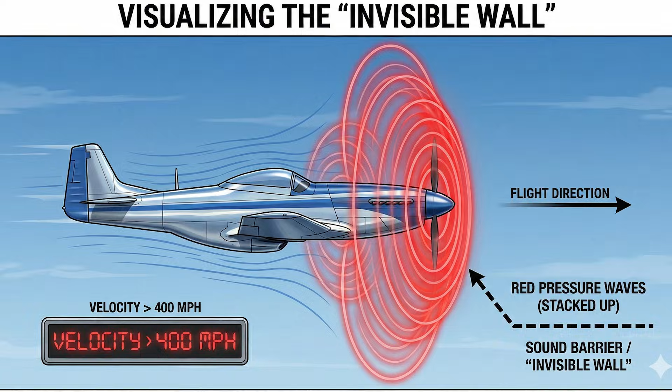Into this breach stepped John Stack, a figure who would become the single most influential aerodynamicist of the mid-century American aeronautical establishment. Stack was not merely an engineer, he was an architect of research infrastructure and a strategist of technology. His tenure at the National Advisory Committee for Aeronautics, NACA, and later the National Aeronautics and Space Administration, NASA, bridged the era of the biplane and the era of the Mach 2 interceptor.

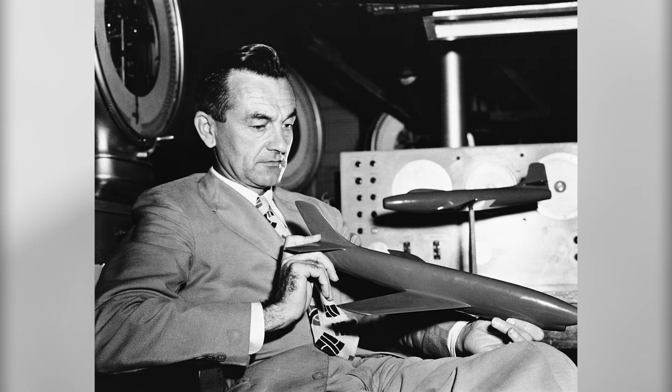Unlike his contemporaries, who often specialized in narrow subdisciplines, Stack possessed a holistic vision that encompassed theoretical physics, experimental facility design, and flight test operations.

This report provides an exhaustive analysis of Stack's contributions, positing that his genius lay in his ability to identify blind spots in aerodynamic knowledge, specifically in the transonic regime, and to construct the physical and intellectual tools required to illuminate them. From the identification of the compressibility burble to the design of the Bell X-1, and from the revolutionary slotted throat wind tunnel to the variable sweep wing, Stack's career is a roadmap of the solutions that made modern high-speed flight possible.

His unique distinction as a two-time Collier Trophy winner, once for a vehicle that broke the sound barrier and once for the ground facility that made such vehicles routine, underscores the duality of his legacy. He was the master of both the air and the wind tunnel.

John Stack was born in September 1906 in Lowell, Massachusetts, a city that was, at the time, a pulsating heart of the American Industrial Revolution.

Growing up amidst the massive textile mills and hydropower systems of the Merrimack River, Stack absorbed the ethos of heavy industry and mechanical pragmatism. His early interests were kinetic and visceral. He was drawn to motorcycle racing and amateur radio, hobbies that required a hands-on understanding of power, speed, and invisible transmission waves, themes that would echo in his later work with propulsion and shock waves.

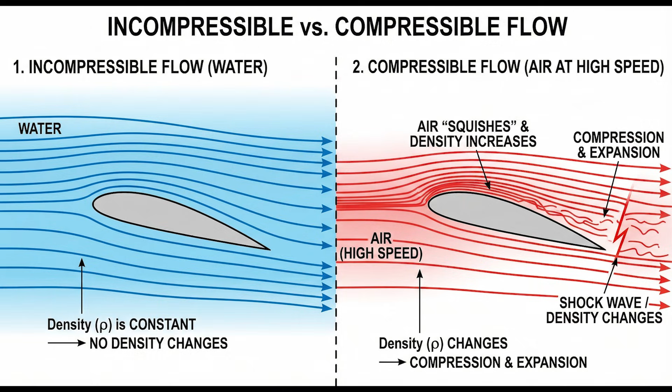However, as racing seaplanes and early monoplane fighters began to push speeds higher, pilots reported strange phenomena: heavy controls, buffeting, and a sudden refusal of the aircraft to accelerate despite increased power.

Stack was among the first to recognize that these were not mechanical failures, but symptoms of a fundamental shift in fluid dynamics. He understood that air is compressible. As an object moves through it, it sends pressure waves ahead to warn the air to move out of the way. These waves travel at the speed of sound. As the object accelerates, it begins to catch up to these waves, causing the air to pile up and compress.

To study this, Stack helped design and operate the 11-inch high-speed tunnel. This was an induction tunnel, using the violent release of compressed air from the VDT's waste tank to induce high-speed flow for short durations, often less than a minute. It was crude, but it was fast.

In 1934, Stack achieved a pivotal breakthrough. Using a Schlieren photographic system, an optical technique that visualizes changes in fluid density, he captured the first clear images of shock waves forming on an airfoil in a wind tunnel. These grainy images were transformative. They showed that even when the free stream velocity was subsonic, e.g. Mach 0.7, the air accelerating over the curved upper surface of the wing could reach supersonic speeds.

Stack observed that where this local supersonic flow was forced to slow down to subsonic speeds, a shock wave formed. Behind this shock wave, the boundary layer of air separated from the wing surface, creating a turbulent, chaotic wake. Stack termed this phenomenon the compressibility burble. The burble was effectively a stall, but one caused by speed rather than angle of attack.

Stack's analysis in reports such as The Compressibility Burble, NACA TR 592, and The Compressibility Factor, 1935, detailed the consequences of this phenomenon: drag divergence. Drag did not increase linearly - it skyrocketed exponentially as the critical Mach number was exceeded.

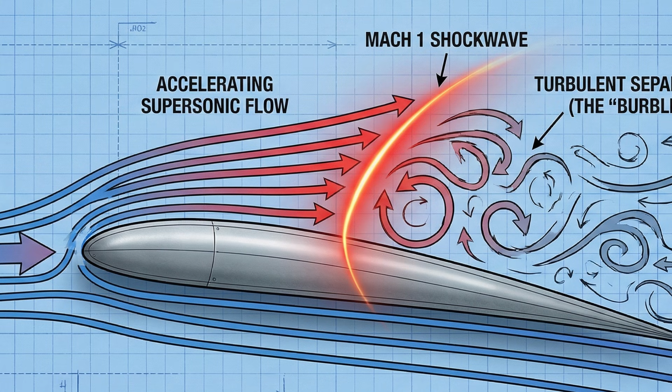Loss of lift: the separation of airflow behind the shock wave destroyed the suction on the upper wing surface. Mach tuck: the loss of lift on the wing, combined with changes in the downwash hitting the tail, caused the aircraft's nose to pitch down violently, a condition that could become unrecoverable in a dive.

Stack's work in the 1930s laid the theoretical foundation for the crisis that would engulf combat aviation in World War II. When P-38 Lightning pilots began dying in high-speed dives, it was Stack's theory of the compressibility burble that explained why their controls locked up and their tails were torn off.

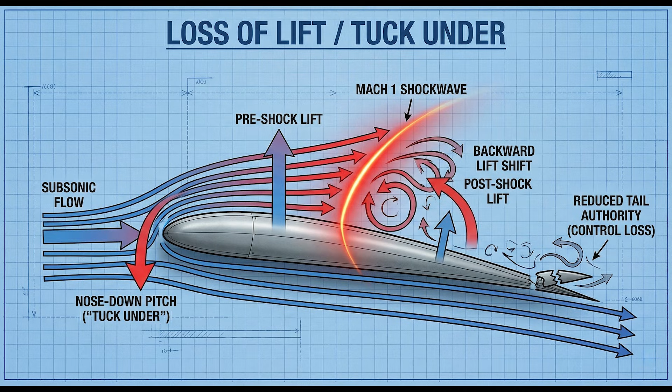Recognizing that the 11-inch tunnel was too small for detailed pressure measurements, Stack pushed for the construction of the 24-inch high-speed tunnel. Operational by the mid-30s, this facility allowed Stack to test a new family of airfoils. In 1938, he published tests of N85, N86, and N87 airfoil sections, which introduced the NACA 16 series airfoils.

These designs were radically different from the thick, high-lift wings of the 1920s. They were thin, with the maximum thickness moved further aft to delay the acceleration of airflow and thus delay the formation of the shock wave. This concept, designing specifically to raise the critical Mach number, would later inform the wings of the P-51 Mustang and the Bell X-1.

By 1940, Stack faced a methodological crisis. Its high-speed wind tunnels, including the newly repowered 8-foot high-speed tunnel, HST, suffered from a fatal flaw known as choking. As the airflow in the tunnel throat approached Mach 1, shock waves would form and reflect off the tunnel walls, striking the model and corrupting the data.

This created a transonic blind spot between roughly Mach 0.75 and Mach 1.3, where wind tunnels were useless. Engineers resorted to desperate measures: drop bodies, dropping weighted models from B-29s to achieve terminal velocity through the transonic range; and the wing flow method, mounting small models on the wings of P-51s, using the accelerated flow over the fighter's wing to simulate transonic speeds. Stack viewed these as inadequate stopgaps.

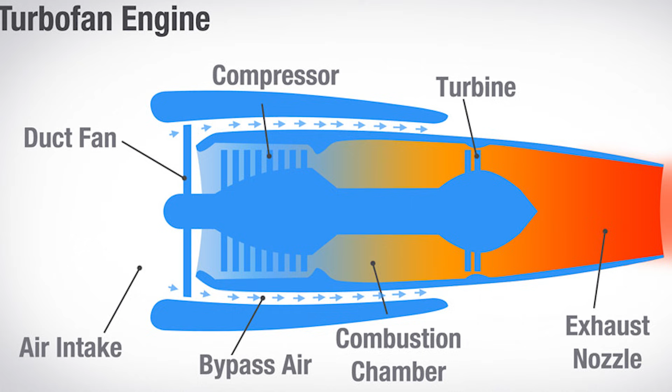Stack found a counterpart in the Army Air Forces, Major Ezra Kotcher. Both men agreed on the necessity of a manned research vehicle, but they diverged on the propulsion. Stack, prioritizing data collection duration and safety, advocated for a turbojet-powered aircraft. Kotcher, focused on raw thrust to punch through the drag rise, argued for a rocket engine.

The result was a two-pronged approach: the Navy NACA D558 Skystreak, a jet-powered aircraft, Stack's preference; and the Army NACA XS-1, Bell X-1, a rocket-powered aircraft, Kotcher's preference.

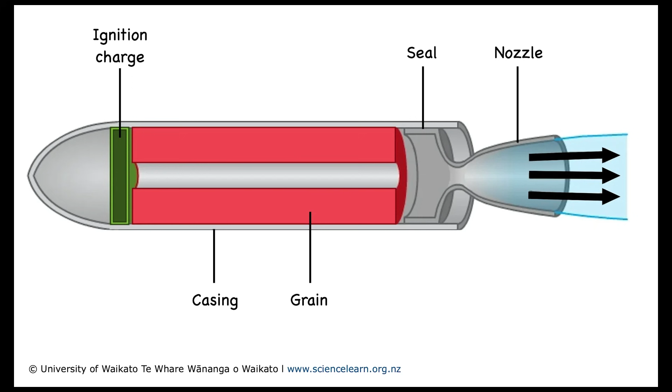Stack played a dominant role in the aerodynamic configuration of the X-1. While Bell Aircraft, Lawrence Bell and Robert Woods, built the machine, the outer mold line was dictated by Stack's compressibility data.

The thin wing. Stack insisted on a wing thickness-to-chord ratio of 10% or less, far thinner than contemporary fighters, to mitigate shockwave formation. The all-moving tail.

This was Stack's most critical contribution. He and colleague Robert Gilruth predicted that as the X-1 approached Mach 1, a shock wave would form on the horizontal stabilizer, rendering the elevator ineffective, a phenomenon known as control freezing. Stack insisted that the entire horizontal stabilizer be movable to provide pitch control when the elevator failed. This feature saved the program.

On the record-breaking flight, Yeager lost elevator authority but maintained control using the moving stabilizer. On October 14, 1947, the X-1 broke the sound barrier. The achievement was a vindication of Stack's belief that the barrier was a steep hill of drag, not a solid wall.